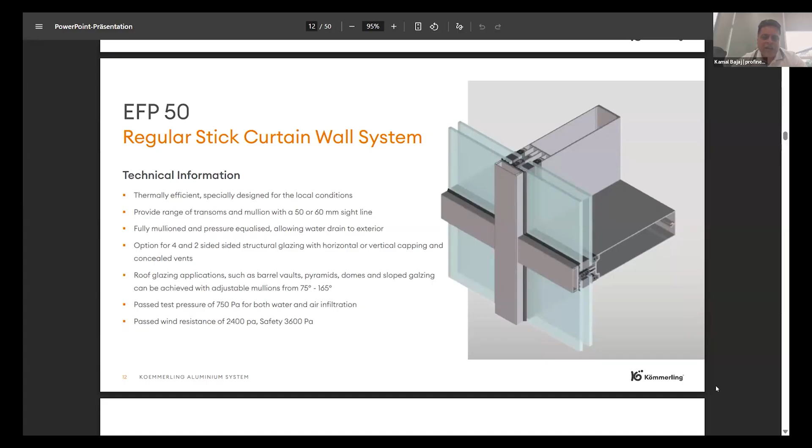It is a very thermally efficient system in which we have to do knurling and crimping at site, and it can be installed at site. All these systems are tested, and high class polyamide products are used for thermal breaking, and EPDM gaskets of automobile grades are used in this, which can survive up to 25-30 years. We have a project in India which we have done in 2007, BKC Sofitel Hotel, and it is standing proudly in that region.

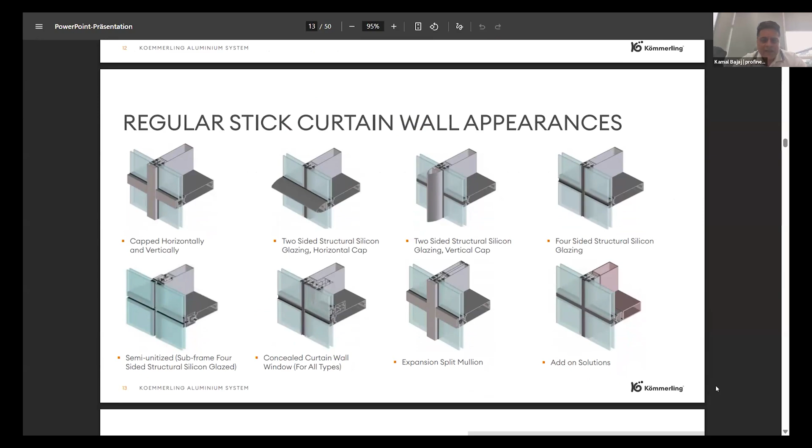And facade is - so there are different kinds of stick curtain walls. I think most of the guys in the panel know about facades, whether it is structurally glazed or pressure plate or toggle systems. So this is about how, capped horizontally and vertically, we connect.

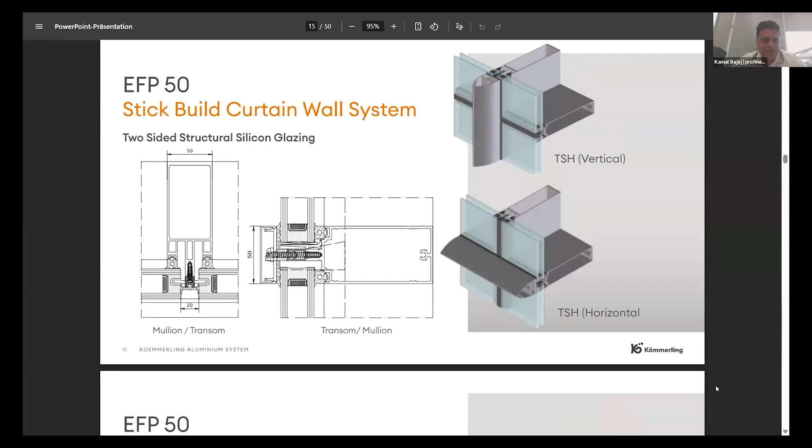This is also about structural silicon, how it is connected. You can move to the next. This is two-sided structure, this is four-sided structure for sleek view.

This is our semi-unitized system. This is capped horizontally and vertically, or vertically we can do it two side, four side.

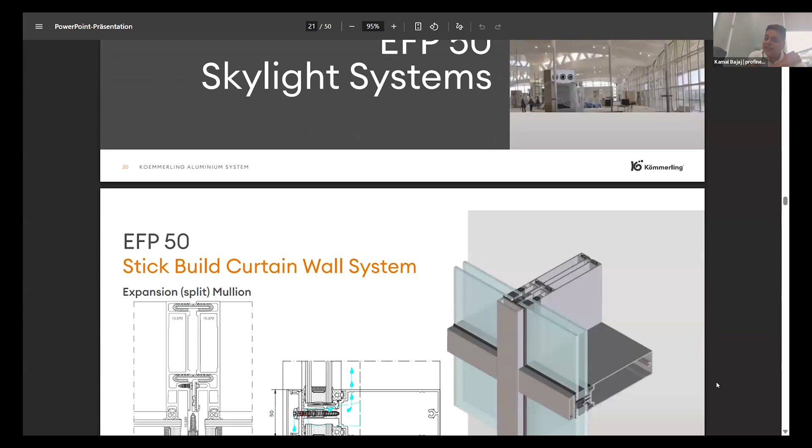So these are the skylight systems we also provide using similar facade sections. We have done a 3 kilometer long skylight system in Kuwait in a shopping mall, which is running for last 6-7 years.

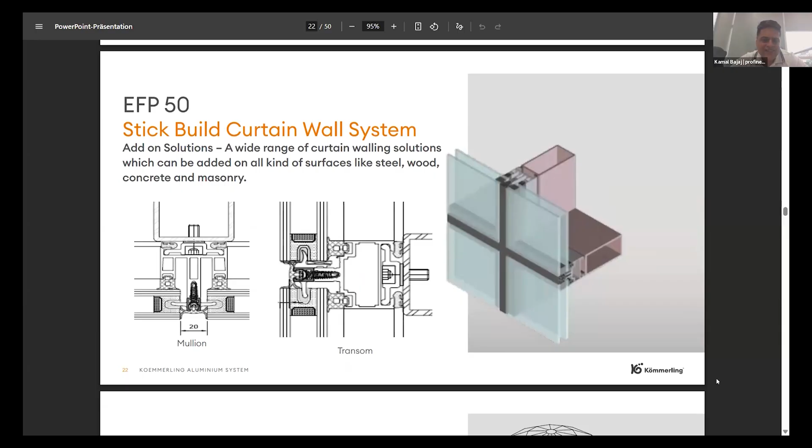So this is also stick build curtain wall system, expansion mullion. This is the add-on solution where steel is put to provide extra strength for larger panels. This is the skylight system.

Different shapes are possible. Now comes the unitized curtain wall for commercial buildings where very large areas are there. Most of this work is done in the factory and panels are installed at site using brackets.

I've seen the photograph in one of the presentations where the brackets were getting spoiled after some time. Mostly in India, in most of the projects, what happens for unitized facade is the fabricator or the builder opts for steel brackets because aluminium brackets are a little bit costly - not little bit, I would say nearly 3 times the cost.

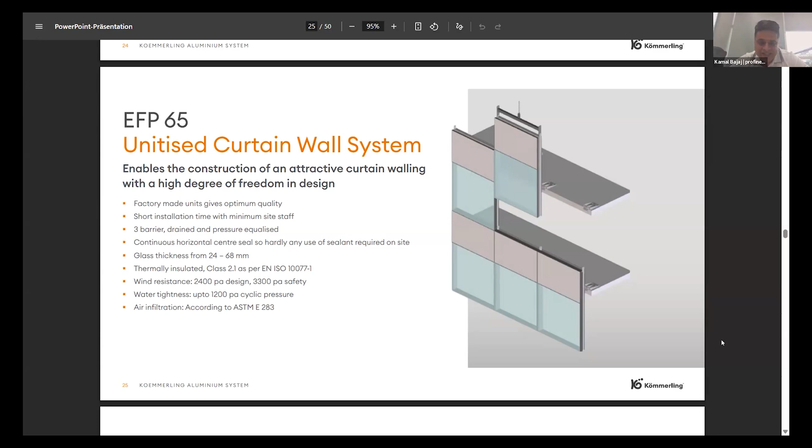But if you see the condition of those facades after 20 years - all the steel, you can maintain as well, you have to keep them painting every year or maybe in couple of years, but once it gets corroded, then it becomes a big pain. Replacing them is a big headache. My request to all the consultants is, go for aluminium floor brackets. Cost is high, but it will be trouble free for life.